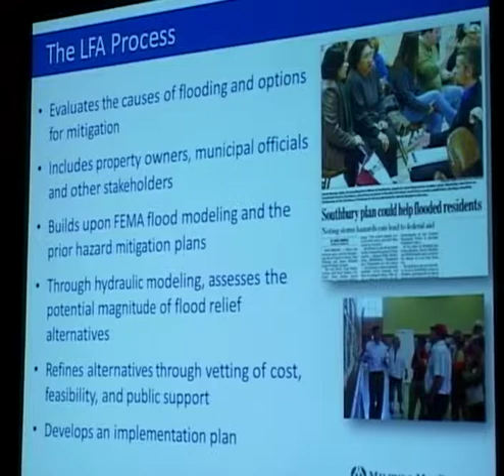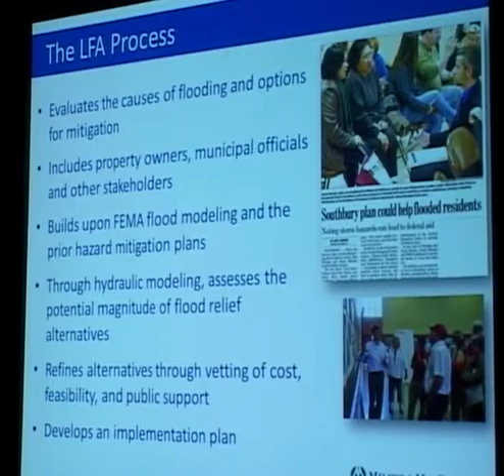The local flood analysis process. We start by evaluating the causes of flooding and what our options are for mitigating or reducing the flooding. As you'll see here tonight, the process includes the property owners, municipal officials, other people in some way influenced or affected by the flooding. We don't start from scratch. We build on a lot of existing information. FEMA has put together flood models and flood maps of the area. Both the town and the county have hazard and flood mitigation plans, and we'll work off of those. So that's our starting point, and then we'll put together a full analysis and plan.

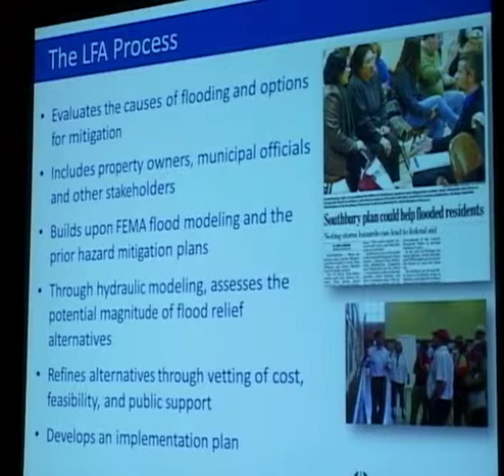Each idea that gets suggested for reducing water surface elevations or reducing flooding, we have the ability to assess it using hydraulic modeling. For example, if you take a bridge out, or if you replace a bridge with a larger bridge, if you widen the channel in a certain place, we can model those sorts of alternatives and see if it actually results in any flood relief in some of these big storm events.

Once we've chosen our top flood mitigation strategies, we could refine the alternatives, we could vet the costs, and we could do a benefit cost analysis. It's not worth spending $1 million to reduce flooding on one home. But we try and find strategies where the flood mitigation is worth the cost that you put into it because of the reductions in flooding that come out of it. And the end product is an implementation plan.

Now here I said there's 2 study areas. This is the Mount Tremper study area, and these are just marked the boundaries out on a map. We do have this drawn out on the maps working with the Safari group. I put them on here so you can see where they are. This is the Esopus Creek and the Beaver Kill coming in.

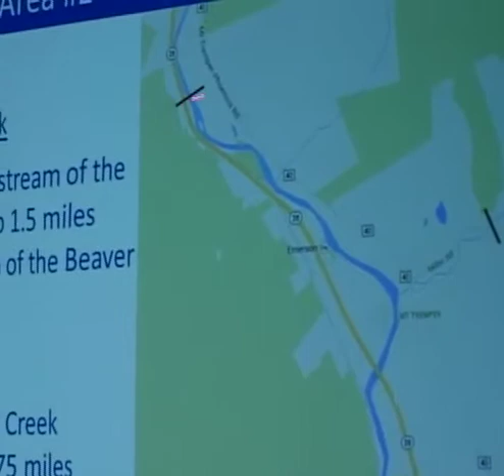At the upstream end, it's 3 miles upstream of the confluence with the Beaver Kill, going upstream, and then about 1.5 miles going downstream. So about 4.5 miles of the Esopus Creek, and then going up the Beaver Kill about 3/4 mile.

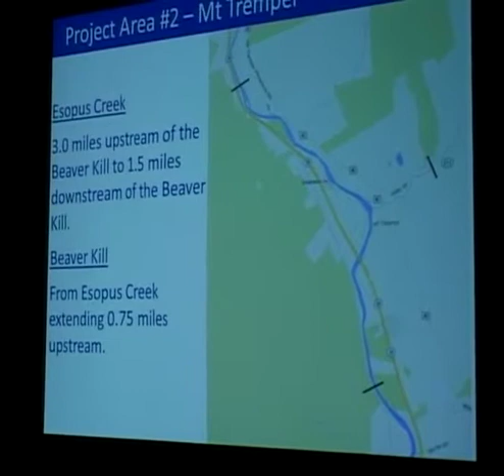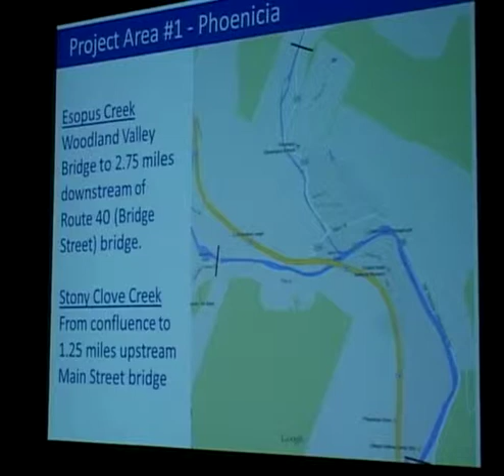Last Tuesday night, we had a similar meeting in Phoenicia, and we spent quite a while. A lot of people had comments, and we were talking about the other study area, which is Phoenicia itself, which also includes the Esopus Creek. And in fact, the boundary here at the downstream end, then you get into this Mount Tremper project area, and then going up Stony Clove as well.

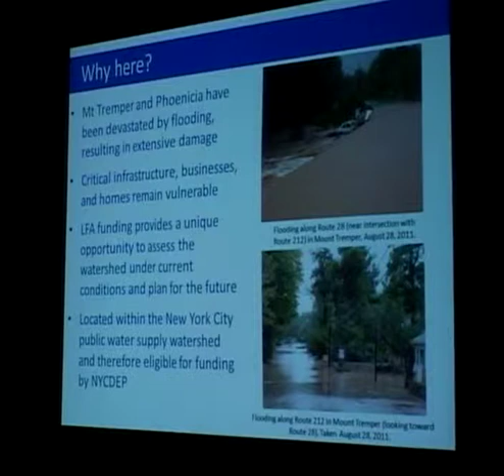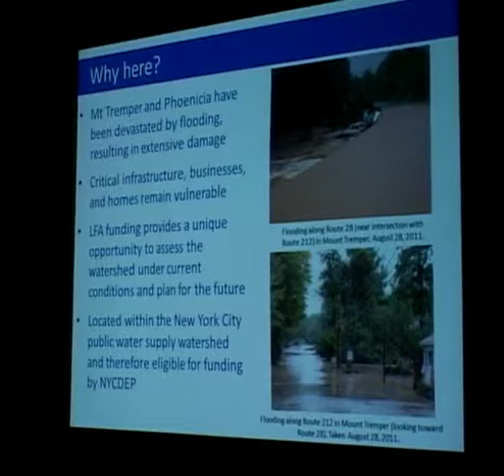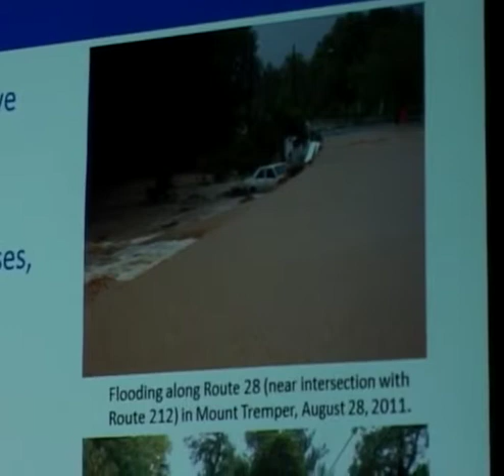So why did we select Phoenicia and Mount Tremper? Why were those areas selected? They've been devastated by floods in the past, not just by Irene, but by other flooding events prior to that. Critical infrastructure and businesses and homes still remain vulnerable to flooding. And flood analysis funding provides a unique opportunity to do this assessment. And because it's in the New York City watershed, there's funding available through the New York City DEP to do this work.

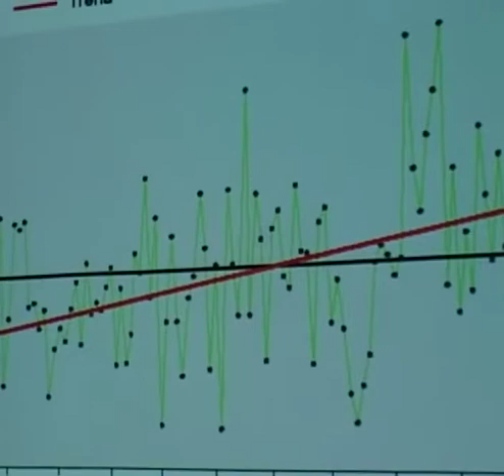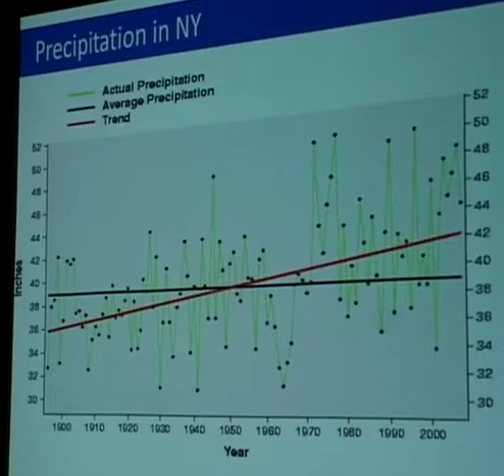Over the last century or so, they've been tracking precipitation, and we can see there's been an increase. The black line represents average precipitation, somewhere between 38 and 40 inches over the last century. You can see the red line represents a trend. It's the average over time. And you can see that in the last 30 years, 40 years or so, there's been an upward increase in overall precipitation in New York.

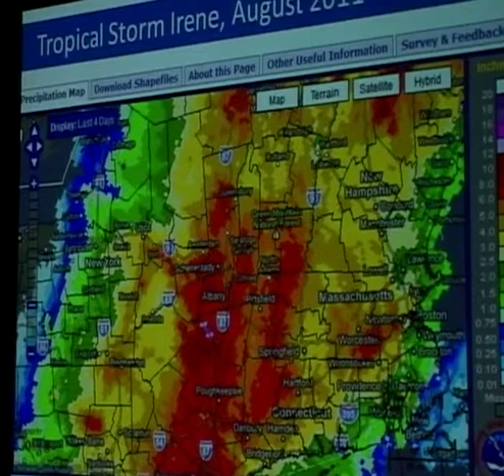In addition to that, and I'm sure people who live in this area are well aware of this, we've had what seems to be an increase in rather intense or extreme weather events. This map shows the amount of rainfall that occurred during Irene. If you go up here, darker red into purple, it shows the number of inches increasing. And you see very high levels in Ulster County, and that purple there in Greene County, where for example Stony Clove originates. So a lot of rainfall in a very short period of time.

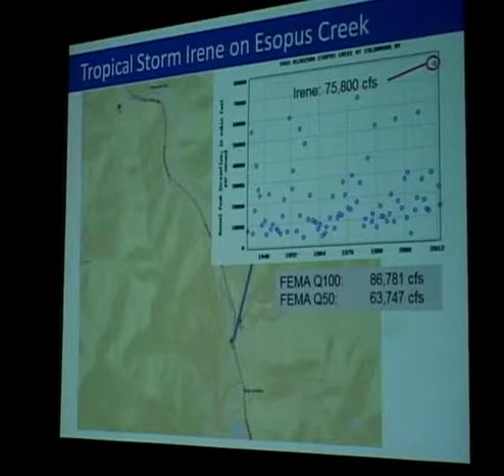And this is looking a little further downstream, Cold Brook area. This is downstream, and now you've had the Stony Clove come in, the Beaver Kill, and other tributaries. Now we've got 75,800 CFS during Irene. And again, it's greater than the 50-year flow, not quite reaching the 100-year flow.

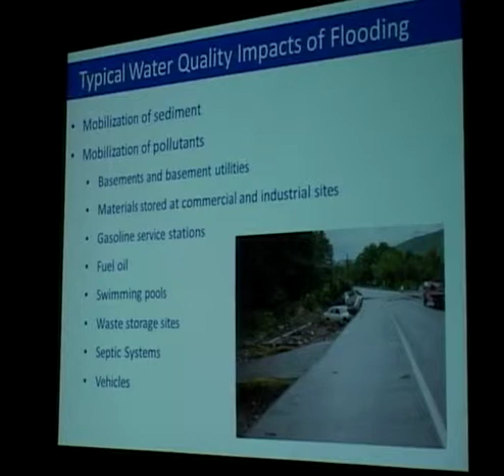Of course, the damage during the flooding is not just the flooding and the damage to structures because of fast-moving water. There's also a lot of water quality impacts, as cars get flooded, parking lots, propane tanks, and stream banks get eroded and sediments move downstream. We had some pretty major bank failures. For example, on Stony Clove, as the toe washed away, the bank slid down and there was a lot of mobilization of sediment. So that's sort of a secondary impact of flooding.

I want to step through the process of public meetings. Some of these we've had already and others are coming. We started in early September. We made a presentation similar to this one to the town board to kick off the study. And now last Tuesday and then tonight here in Mount Tremper, we're having meetings such as this one. We've got maps, we're gathering information, explaining what an LFA is, and collecting information from all of you.

And then we'll do a final presentation to the town board once all that is wrapped up.

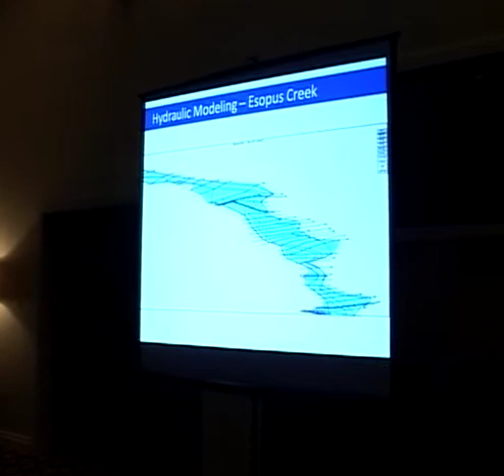I want to say a little bit about the hydraulic modeling. These are just some examples. We've got models for Esopus Creek, Stony Clove, the Beaver Kill. We obtain these models. These are preliminary models, pretty new, fresh models, which is nice that we have these here; in many communities where we work, we're dealing with much older models, and the stream channel has changed. These are quite new models based on new survey.

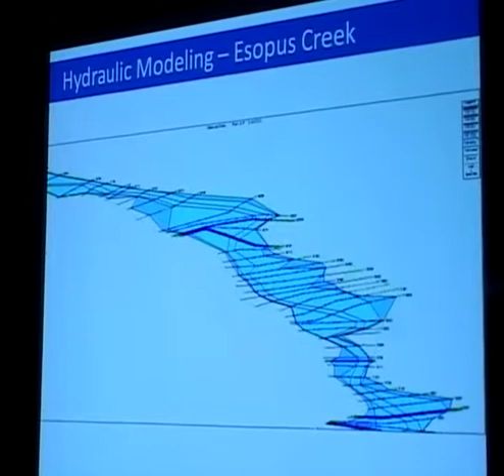This is just one example from Stony Clove, or rather from Esopus Creek. This is the creek in the model, and the model is made up of these cross sections. You see the lines going across. And I'll just show a couple examples of the cross sections. You can see what they look like. It's as if you've sliced the channel, and now you're actually standing in the channel looking at it in cross section. And these are just 4 examples I picked.

It shows a couple of the bridges and then open areas of channel. And you can see it's the channel in cross section, and then these lines represent different magnitude floods. And when we come up with ideas for what might reduce flooding, we can try it out in the model by altering that cross section.

For example, this cross section has a bridge in it. We can just pull that bridge out of there and see what happens. Does that reduce flooding? We can replace it with a larger bridge. Say we wanted to make the channel deeper right here or make it wider. See what sort of influence that has on flooding.

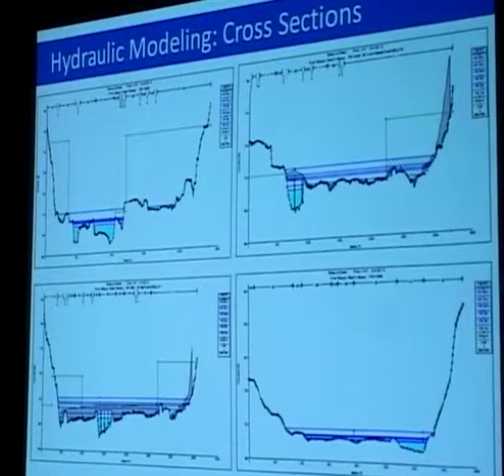And this, using the same model, is a water surface profile. So again, it's Esopus Creek. It's flowing on your screen from right to left. This is the Mount Pleasant Road Bridge and the Route 28 bridge. You can see, under smaller floods, the water is passing underneath the bridge. During the larger floods, it's passing over the bridge. You can see the water piles up a little bit here at the Route 28 bridge under larger flows.

We'll have that profile for the whole study area, including up Beaver Kill, and we could see what sort of impact different channel modifications have on getting homes and businesses out of the floodplain.

I had another thought there. I'm just trying to remember what it was.

I just wanted to say this model is a tool. It's one of many that we use, and there's also a certain amount of expertise and experience that go into determining which of these ideas and alternatives are feasible and which are not. It's not a black box. You don't put all your information in and it spits out an answer. There's a bit of finesse, modeling different stream scenarios.

And in the end, it has to be something we can permit, something that is cost effective, something that is going to be stable from a river morphology point of view. We don't want to do something that's going to cause the whole stream channel to unravel and cause greater problems in the future.

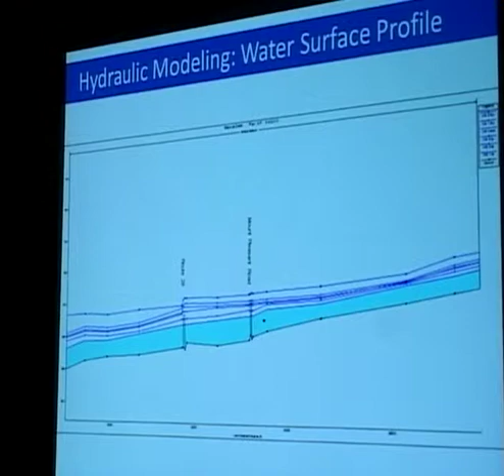Here are some suggestions for the types of flood mitigation strategies to be modeled. We've done these sorts of strategies in other places. Alteration of the channel itself, whether it's a widening of the channel, realignment of the channel, or creation of compound channels. Floodplain alteration, whether it's reclamation of floodplain, an area that was once floodplain and has now been filled in,

or creation of floodplain in areas that aren't now floodplain but may reduce flooding if we were able to create a floodplain bench or a floodplain shelf, and then enhancement of existing floodplain. If you can get the water out of the channel during a flood onto the floodplain, you're able to slow down velocities and reduce sedimentation. In fact, often the sediments are deposited in the floodplain.

Bridge replacement, we've seen this to be very effective in some areas where bridges are undersized and the water really piles up behind the bridge. If there's homes located just upstream of the bridge around the channel, sometimes the flooding from the stream is because that bridge is undersized. And if you could replace the bridge with either a wider bridge or a higher bridge, that could have a role in reducing flooding. And sometimes that could be done in combination with, say, the floodplain creation scenario.

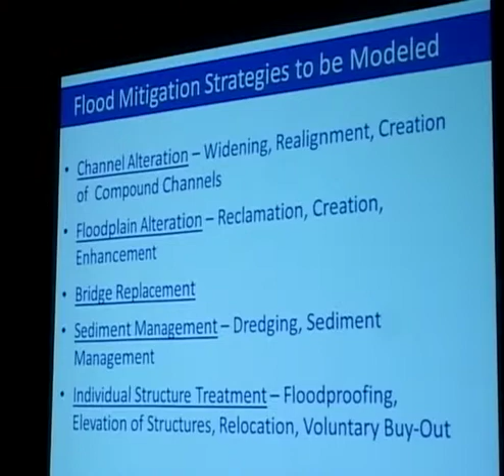So what are the final outcomes of all of this? We'll have a scientifically based engineering analysis. It'll include a benefit cost analysis, so we understand which strategies are viable and which ones are not. We'll provide conceptual design plans for mitigation options. We'll come up with preliminary cost estimates. They won't be design ready, but they will be a pretty good cost estimate of what it would cost to enact these strategies. We'll help to identify potential funding sources.

And some of the things we will recommend possibly we'll be able to implement right away. Others will say that's just way too expensive. To replace that bridge would cost $12 million, and it's not something we could do right now. But it may be something that remains in town plans, remains in people's minds. And when it does come time for that bridge to be replaced anyways, you pull out this analysis and say, well, look, it needs to be replaced with a larger structure. So think of it as both a near-term and a long-term blueprint for flood mitigation. It won't all get done immediately.

And it'll give everyone a better understanding of what sort of alternatives are feasible, which are not, what's cost-effective, and what the citizens of Phoenicia, that should say Mount Tremper, I forgot to change that word, find desirable. We'll come up with strategies that may be effective in reducing flooding, and everyone may say, we just don't want that to happen here. That part of town, you cannot make that into a floodplain because that particular business is just too important to the town. It may result in some flood reduction, but it would be at too much of a cost. So that'll be the sort of input we're looking for.